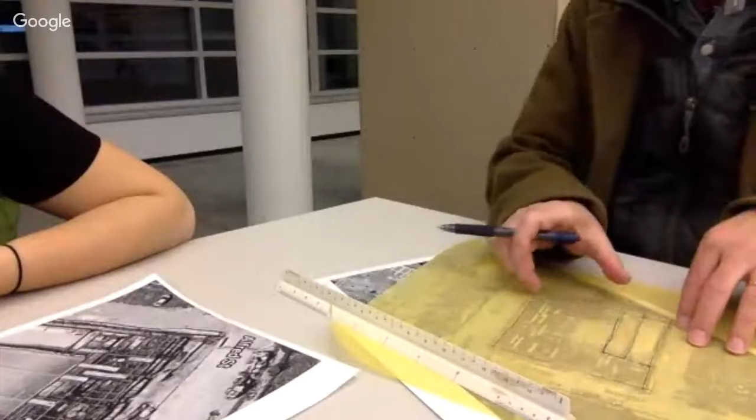This is that speed ramp, and while it's going down from the alley here, we realize that there's only kind of an L shape that remains, right? A thin liner of opportunity, an outer leg of opportunity along John R. And the rocks in a canvas bag conversation that I was having basically says something doesn't seem right. So let me just double check this real quick because this looks big suddenly. But basically it meant that everything that was going to be running along 151 divided by 16.

This one's 1/32nd. Oh, this is 1/32nd. Yeah, this one's the 16, but it wouldn't fit on the page, I get it. So 151 divided by 32. So 1/32. So it doesn't take up that much room, Andrew. That's true. 1/32. So that's not a scale I like. 1/32 of an inch. So 1 divided by 32 times 24 equals 0.75 of an inch, right? So I had it twice as big.

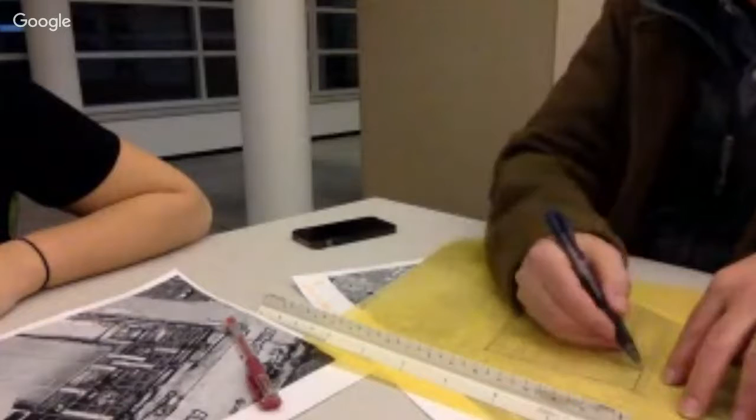So knowing that I've got that footprint remaining, right? I say, okay, I've got a lot of first floor program that I've got to fit. Do you mean like ground floor? Yeah, okay, that's right. That I've got to fit somewhere on the property. And on the first floor, that program says that I've got to have retail along the corner at that northeast corner, probably more along John R. and probably just an acceptable amount along Alfred, right?

But like I was saying about the rocks in the bag, we're also going to have things like trash, right? Loading. We're going to have a stair probably down here. So, right? We're probably going to have a stair over here somewhere. I'll just put it here for now in the corner. And those are fairly remote from one another, and they'll work for an upper floor. And so all of that program starts to play out like this.

So you put like the trash room and the generator, right? Because generators are going to need to breathe. Trash rooms need to have overhead doors that allow the trash to go out to the alley, right? I could probably get the retail in this realm here. I can probably get like a lobby in here that connects somehow, right, to the back of the building off of the street, off of Alfred and back to the back of house. So this leaves this whole area for mail room.

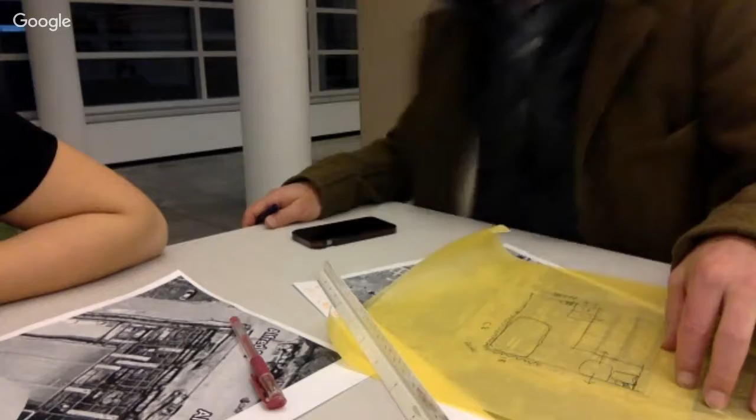And what are the other program elements that we have in that? Keep going up to the typewritten. My typing, that's printing. That's like stuff that I did in InDesign. Go all the way up there. So all of those things on page 2 of the program brief, Andrew and Desmond, right? All of that stuff. So I'm going to walk over here real quick. Yeah, that's where it shows ground floor, percentage.

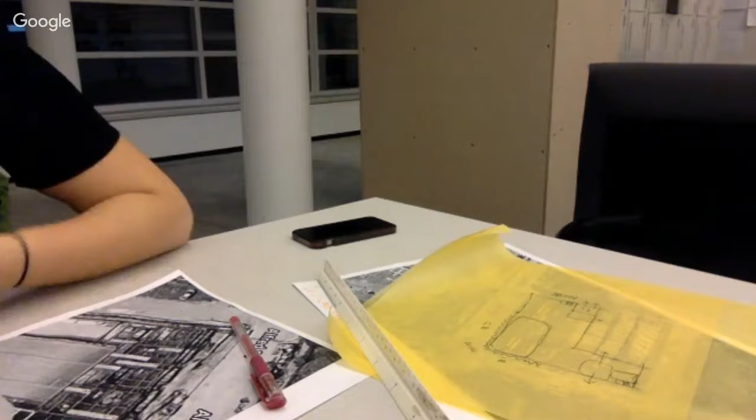3,000 square feet of retail, a lobby that has a mail room, a sitting area, a leasing office, a meter room, building maintenance shop, mechanical room, electrical room, loading, unloading area, transformer that can go on the site, generator room, recycling and trash room, subgrade water cisterns if to be determined, bicycle storage.

So you guys, while I appreciated the innovation, right, of the program spaces that you brought to the table, you have to account for all of those spaces first, right? And you're going to see that the inclusion of all of those spaces, they're going to fill up, right? They're going to fill up all of like leasing office, mail room, right? Their bike storage maybe, or bike storage here. It's going to fill up all of this stuff.

So in the shape of the L that you've got, where you privilege retail to the hard corner and to John R. and Alfred, the fact is some of these don't look good on the street. They're going to have windows in them. You're going to want to have windows on the ground floor as much as possible. So things like bike storage, that could be kind of an interesting program element that lets its face show on the street. But the meter room, the generator room, the trash room, right? All of those things start to maybe line up on the west side of that fat L.

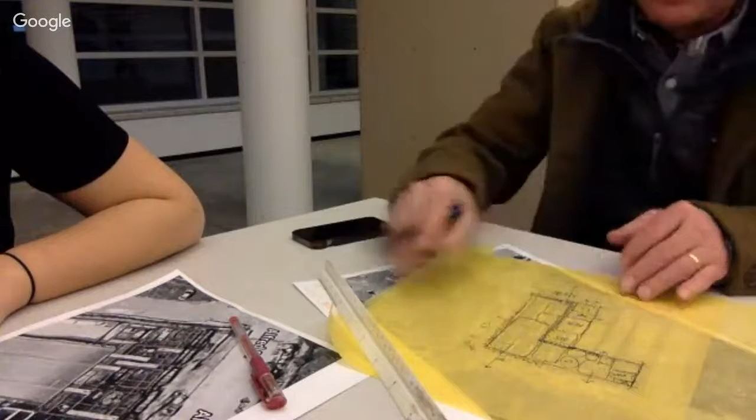So including all of those program elements in the first floor, a first floor that has nothing really to do, you guys, with what's going on upstairs in terms of footprint, is probably going to look something like this. The ramp is here. At some point, you can slip under the ground floor of the ramp, and all of this area here, I could probably draw this better, faster.

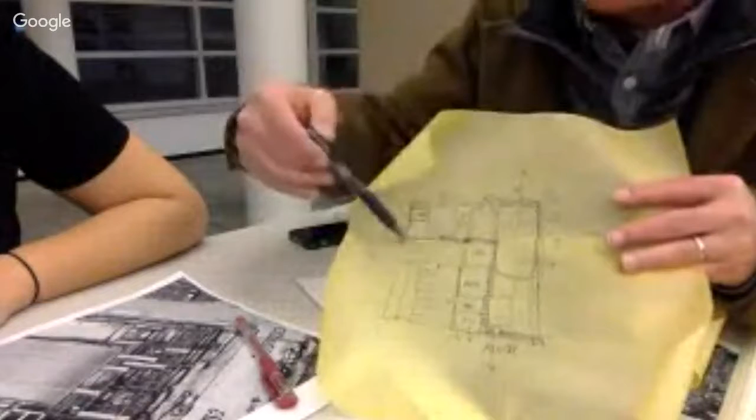All of this area here that I'm sketching on is outdoor space. So I'm going to summarize that. Right? That makes sense. So again, what I'm trying to say is the alley is here, John R is here, and Alfred is here. You come down the speed ramp, and at some point, like when you walk under a stairway, you have a little ability to bring some of that landscape across.

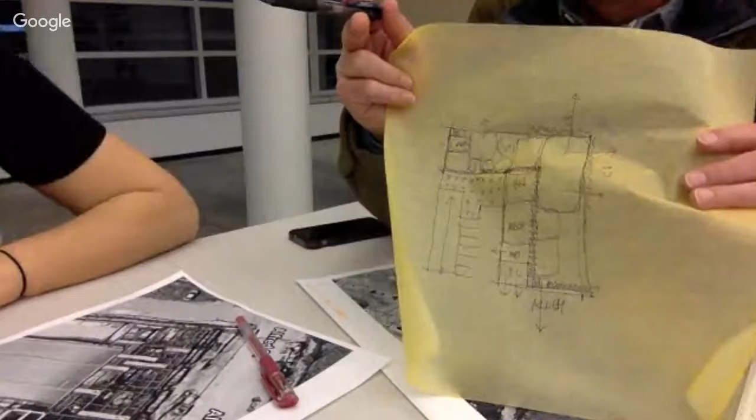But you're going to have basically a buildable footprint that you can mark out that looks like this. That's going to have an area, right? And that area is your ground floor area. And the reason I'm mentioning this is because some of these first floor program spaces are based upon a percentage of the ground floor area. So if you have a 4,000 or an 8,000 square foot ground floor area, and you have to do a meter room that's 2% of the ground floor area, you suddenly know how big that room has to be.

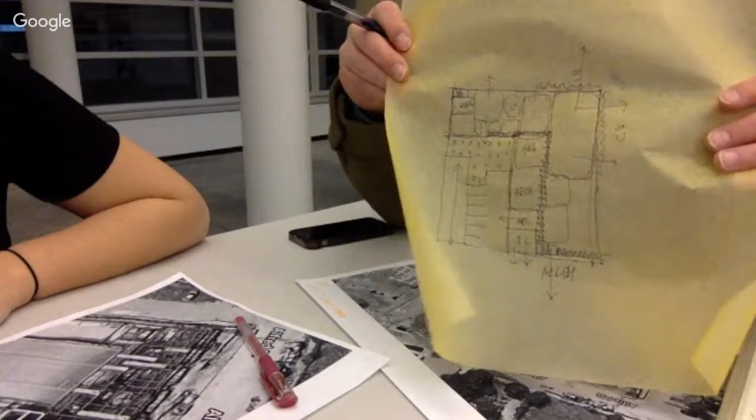And the ziggy-zaggy lines that I'm doing here, that could be a simple service corridor that lets all of those spaces connect to each other and link all of the back of house spaces. So I'm gonna give you this. Now, that's the first thing that I do. The second thing that I do when I lay these out is, and this is exactly what I meant the other day when I said draw by hand.

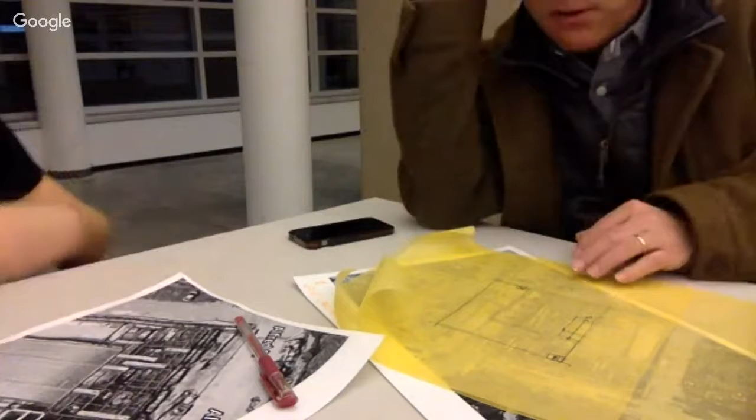I've got the speed ramp coming down. So now I'm at the lower level, right? The speed ramp is probably going to run to here, and it goes up, and like a stairway, it gets cut off. I know that ideally there's going to be a stair in the corner, and maybe a stair down here. Because I've done this class before and I've done this building before, I kind of know that it could work reasonably well when I start dropping parking spaces and drive aisles into that lower level.

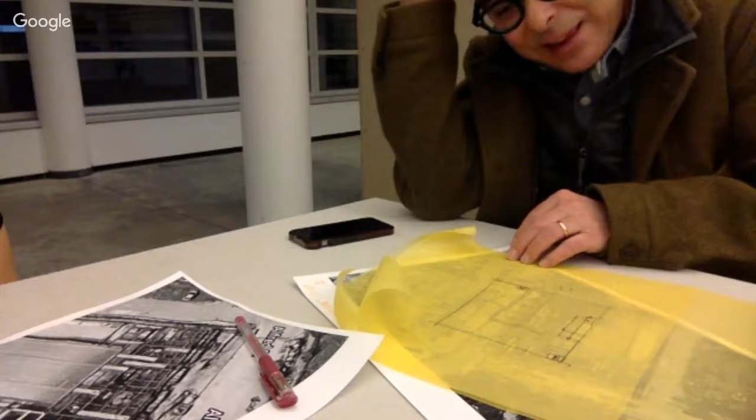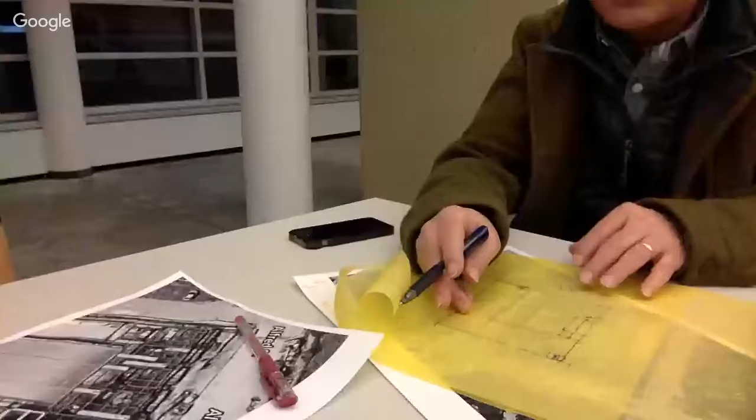Now, I also know that there's going to be elevators and things like that. I don't know where those are going to be. We can finesse that. But one thing a lot of your colleagues have done are what I would call 90-degree parking spaces. You know that you can get about 6 spaces upstairs, right? You might even be able to get 8 spaces upstairs, so 6 here and 2 here. So you may need to provide like 42 or 44 spaces down below.

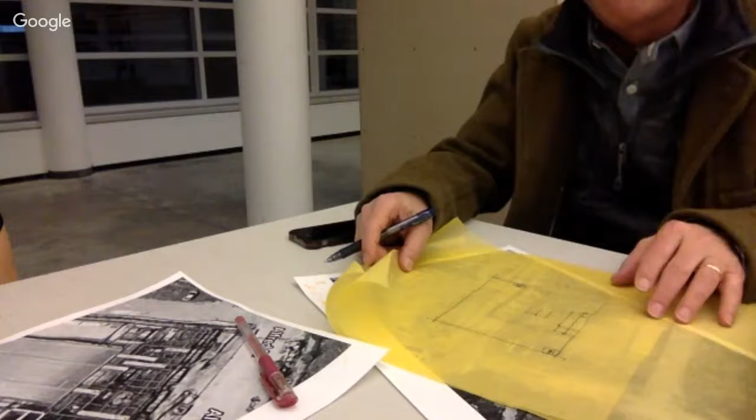One thing everybody's doing right now is 90-degree spaces, but you ought to consider that those spaces require 20-foot aisleways and 20-foot depth. What do you mean by 90 degree? So the spaces I drew here on the site plan are 90 degrees. What kind of car do you drive? Mercedes. So your Mercedes parks like that, and that dimension is 20 and 20. Are you talking about the angled ones they have in shopping centers? I'm talking about regular parking, 20 and 20.

What I am saying for the lower level is like in downtown Birmingham, the parking is at an angle. And when you do angle parking, it takes up less width. So for me to get 3 rows of parking spaces in perpendicular parking, like your Mercedes is parking there, that's 60 feet. But just doing angled parking, I take up less width, so I may be able to get more spaces in a run that looks like that.

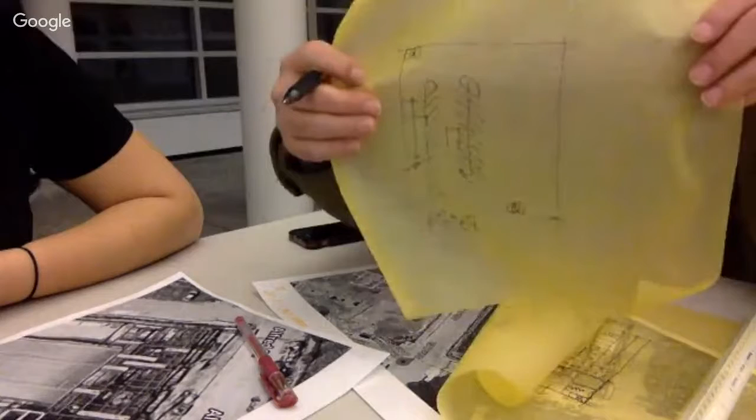Desmond and I spoke after the last class. We mentioned possibly doing 2 floors of underground parking. Is that something that normally wouldn't happen? Or 1.5 floors underground. But this is what I'm saying. This dimension from here to the center line is less than 60 feet. It's like 56 feet. And you may be saying, it's just a couple of feet, but that's a big deal when you're laying out parking in a lower level. So I would try to do that.

And I would look at the lower level as a simple arrangement of maybe one-way traffic that moves through the development, something like that.

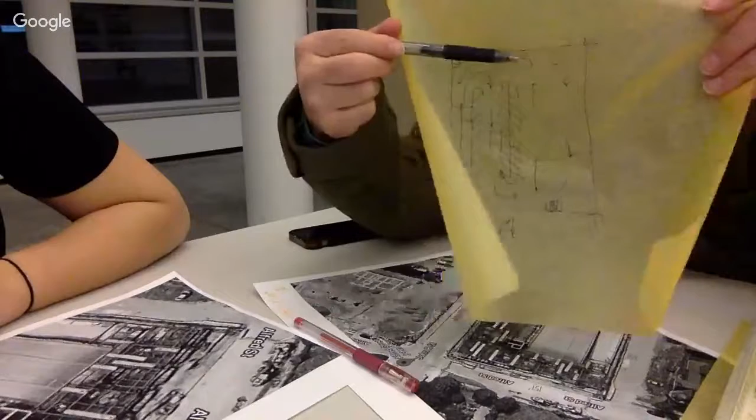So that when you're ready to leave, right? I added that one and I added that one. When you're ready to leave, you go back up. That works. Right? Now, so like another, I'm not saying that this works, but there's a good chance it does. It's my instinct. So that kind of thing.

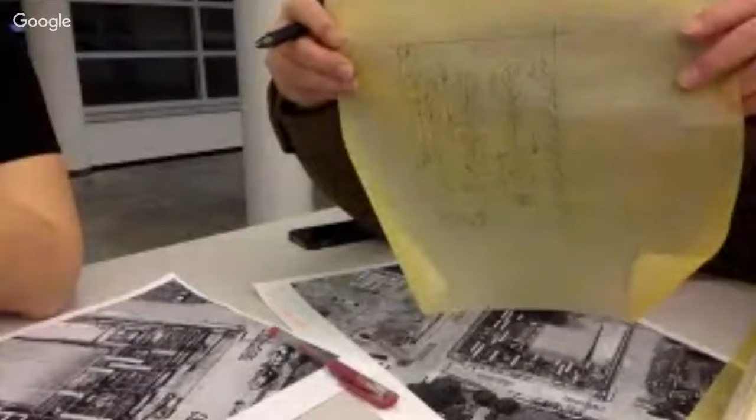What I'm pointing to now is the new parking spaces, right? So this is how I think. When I'm laying these things out, I try to draw to scale, right? I draw in a forgiving medium on a base drawing like the site plan that is to scale, and I just operate on those instincts. And now I've got two plans that are interconnected and work with the parking, right? I don't have everything worked out yet, but I have enough to go on. And you both should flesh that out.

Now what I do is I go to the upstairs. Do you know what the slope is by any chance of that ramp? Is there like a certain? Yes. So that ramp has a profile that starts at grade up at 0, and it drops. So I'm going to draw you the section.

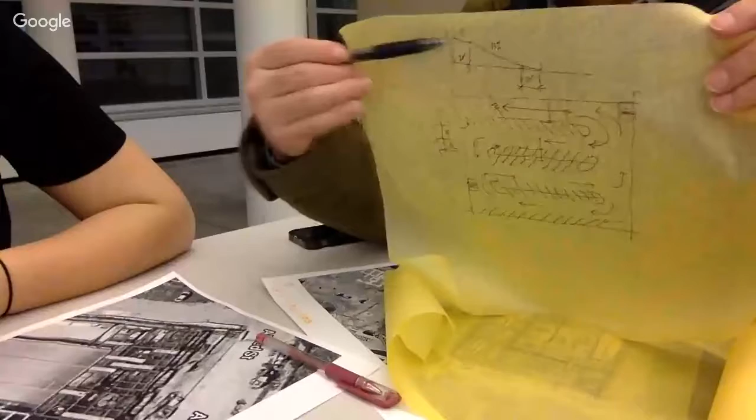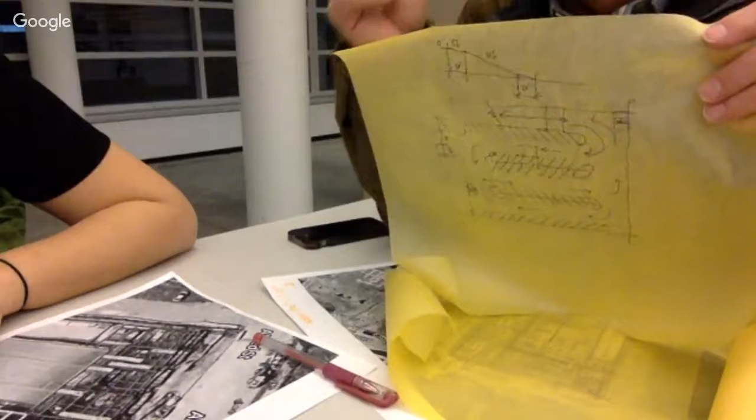So what I've drawn is a section up at the top. At the alley, which is right here, you're at 0. You have a 20-foot, that's a dimension right there. You have a 20-foot paved sloping drive that's at 5%. Okay. That's a transition strip. And you have the same transition strip down at the bottom. And then in the middle, for the length that you need, you can go as much as 13%. Makes sense. Okay. You follow that, right?

Okay, now upstairs, you can go about these things a couple of different ways. Start with the footprint of the site. I'm always trying to contextualize the object into its context. I know right now that we can probably get about 12 units, maybe 13 units per floor. I know that there's going to be a stairway in the corner and there's going to be a stairway at the bottom. I know that because that was an assumption for the lower level and for the ground floor level.

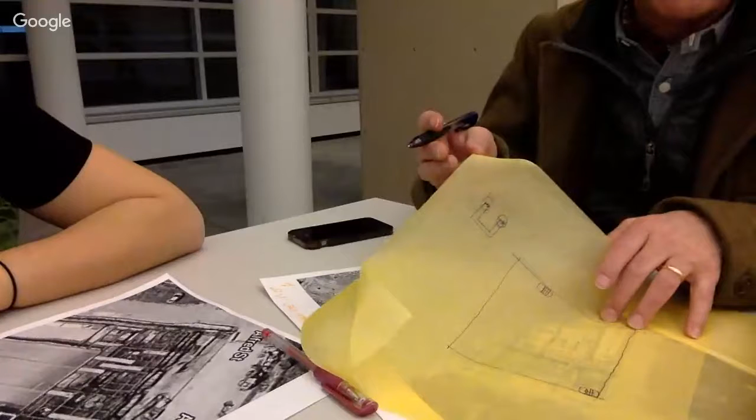You see that? You have to have a stair there at the end and a stair there at the end. So what I would try to do, given where you are in the class and given the nature of this beast, I would start with a simple L, right? And say, okay, if I do that, I know that the corridor is going to be sort of more or less down the middle, but it doesn't have to be. And it's going to look like that.

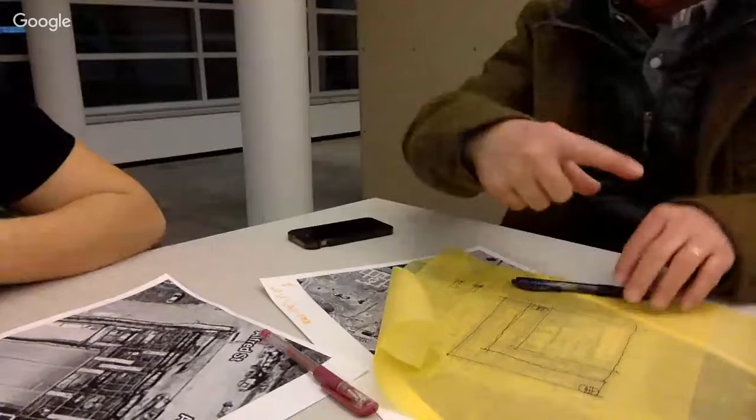I know that the corridor is going to be about 5 feet, maybe 4 feet, right? So right now I've got 2 nesting L's, right? With the corridor as the common thing linking them, looking like this. Capiche? Got that.

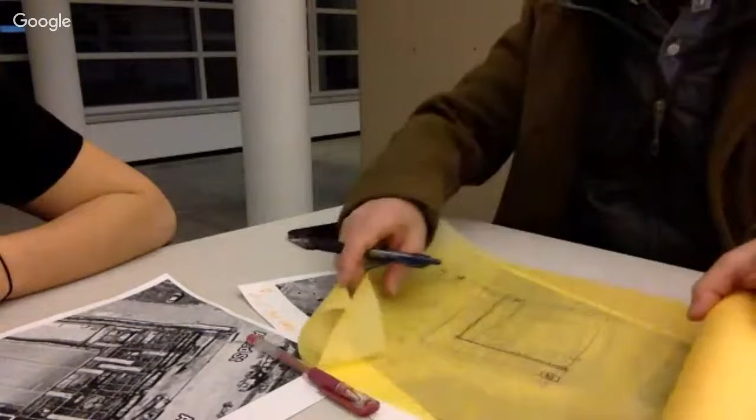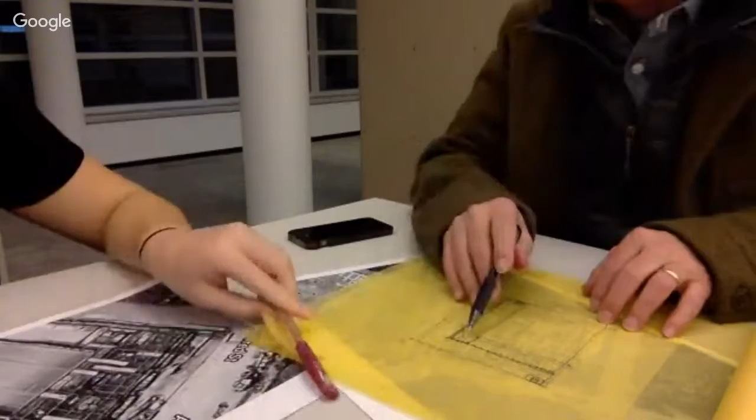And I know when I do an L or a U, I've got a moment where at the sort of armpit or the hinge of that L, where they articulate, where I've got the X now, I can't put any residential content there. Why do I say that so clearly? Because I can't really put sleeping rooms and living rooms there because there's no wall, right, that would have glass.

So that hinge, that armpit is really good for things like laundry rooms, bike storage or personal storage or telephone electric rooms, right? Shafts that might be coming through the building. So the dead zone, if you will, that armpit is actually your friend. So use that to the extent that you can.

So that means I've got a bar that runs here facing south. I've got a bar here that faces west. I've got a bar of residential that faces north and east. I've got an opportunity for this unit here to have light coming in at the south and the west. Likewise here, likewise here. So those are really good 2-bedroom units.

So now I'm going to want like a red magic marker or that orange Sharpie. Do you have a red Sharpie in there, Desmond? Got red pen. Oh, I do. Yeah, of course you do.

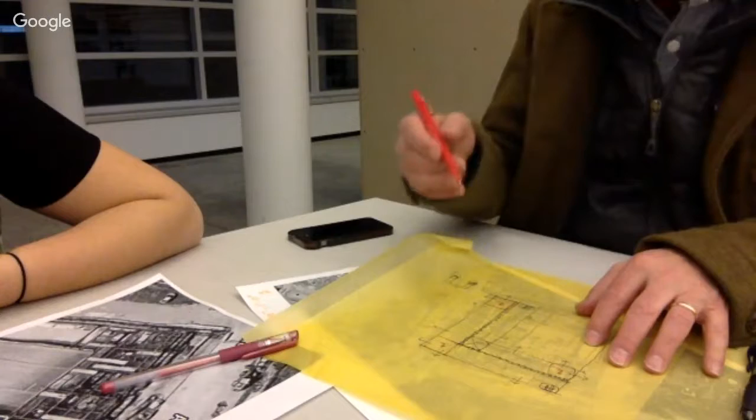So like these, you guys are really good for 2s. How many do we need in the building? 7. 7? 3 floors, 4 floors. So, yeah, you probably only need 2 per floor, right? So suddenly now I've provided instinct, right, on where those should go, Andrew, right?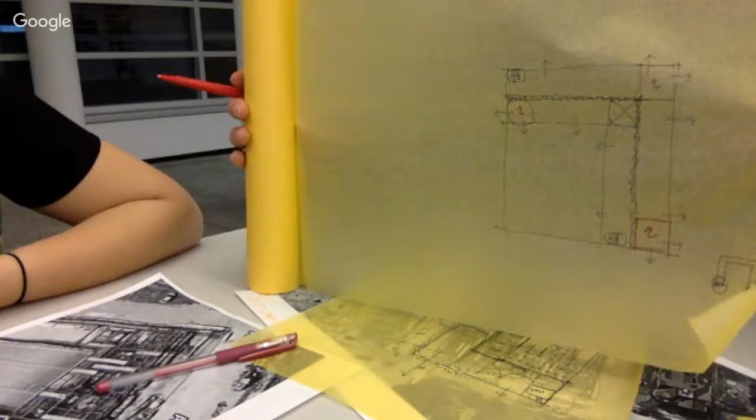Makes sense. Right? Because those are the units that, because you have 2 faces or 2 facades that face different sunlight conditions, you can charge more for those, right? They're corner units. So those are the ones that you generally want to be the bigger units, right? And you charge more for them anyways, right?

So if you do 4 floors of residential and you have how many 2-bedroom units as a requirement? 7. 7. So really you only need 2 per floor, right? 2, 4, 6, and maybe one on the top floor. Penthouse. Yeah. So you can skin that cat any way you want, but you've got sort of 3 options already. You only need to pick 2. You see what I've done? That makes sense. Okay.

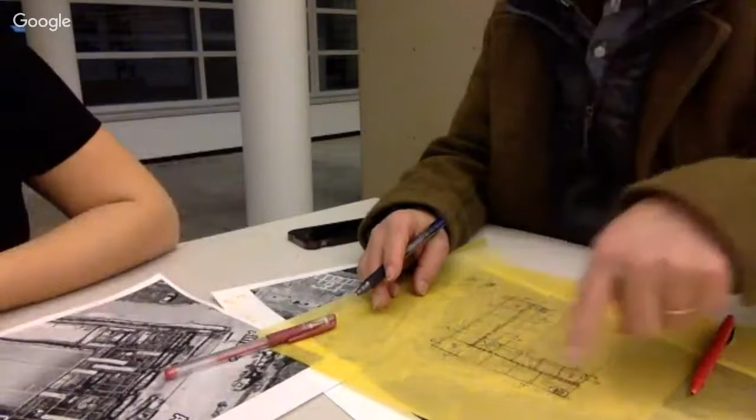So now I know I've got some square footage now to divide up into units. So now I think I can get 1, 2, 3, 4, 5, 6, 7, 8, 9, 10, 11, 12, 13, 14, 15, 16. So I think I've probably cut this cake into too many pieces. These are probably farther apart than I've shown. You see that? But that's okay, because those are just conceptual

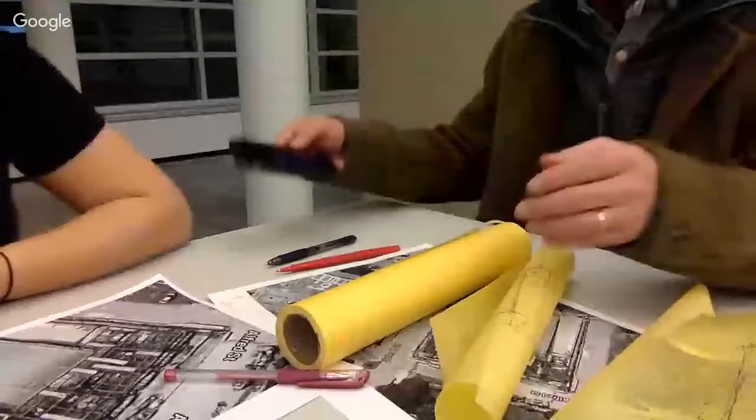demising unit walls. Because I know I'm going to have 4 floors, right, of residential. So 4 floors, 50 divided by 4 is 12.5 per floor. So if I hit 12 per floor, right, so I start over. So maybe stairway.

Maybe the 2-bedroom unit is here. Corridor runs down the middle. We know we have an armpit space here, but maybe this is exercise or laundry. Do we need the exercise on every floor? No. So 1. And you don't need laundry on every floor.

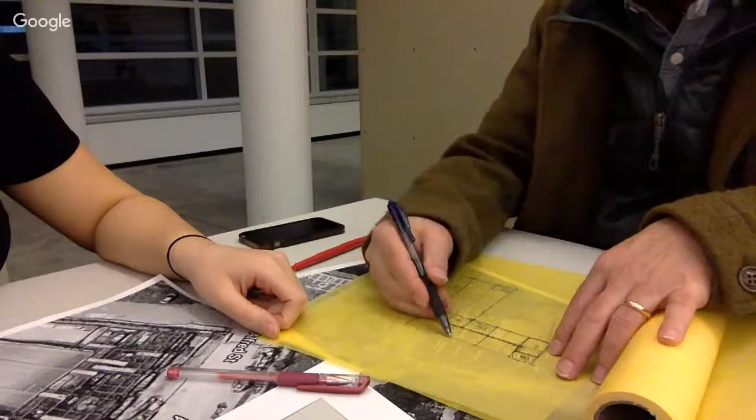Would you recommend putting the laundry and the exercise room all in one floor, or kind of scatter them throughout different floors? I would scatter them. Every other. Knowing now how this is going to shake out. 1, 2, 3, 4, 5, 6. And maybe in the same spot, just so they could relate to it and they know. Yes. Yes, I would do that. I would stack them. Okay. Is that what you meant?

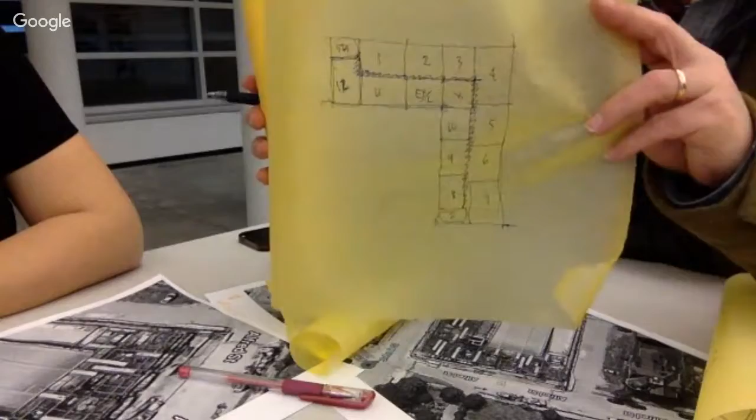Correct. Yes. So 1, 2, 3, 4, 5, 6, 7, 8, 9, 10, 11, 12. Makes sense? Okay. So now I'm sort of saying, okay, I've got an interesting sort of approach here. And the lengths of those spaces, those can all be finessed by you. But now on the second floor, right?

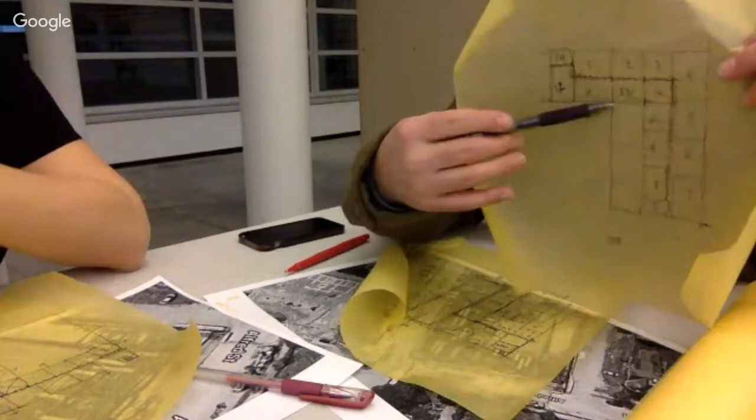Right? I've got some program from the first floor right here. This is the roof of that back of house stuff on the first floor. Okay, so we have an outdoor space or something. Is that what you're getting at, or?

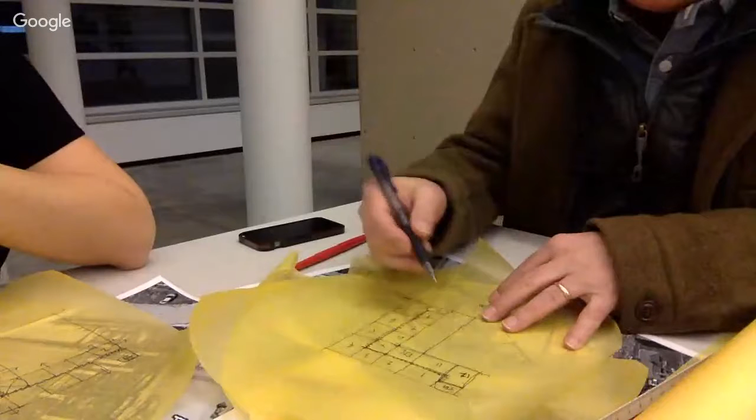Yeah. So the second floor units can be... Terrace? Yeah, so like unit 8, 9, and 10, you see that? Can have terraces, right? I've always said that if I lived in one of these, take the second floor. The penthouse, not so much. You know, I'm not Kanye, right?

That doesn't interest me. What interests me in these buildings is the idea that I can like walk right in, take the stairway up to get to my unit, and similarly, like reverse that process to get out. I can be in and out of the building very quickly, and get my exercise at the same time.

So even if I lived like at the Townsend Hotel, I would live on the second floor, and I'm not alone. Because when I was at Victor's office, we laid out Mr. Gore's suite in the Townsend Hotel, and he wanted the second floor for the same reason. I thought, how interesting. So that's an idea, right?

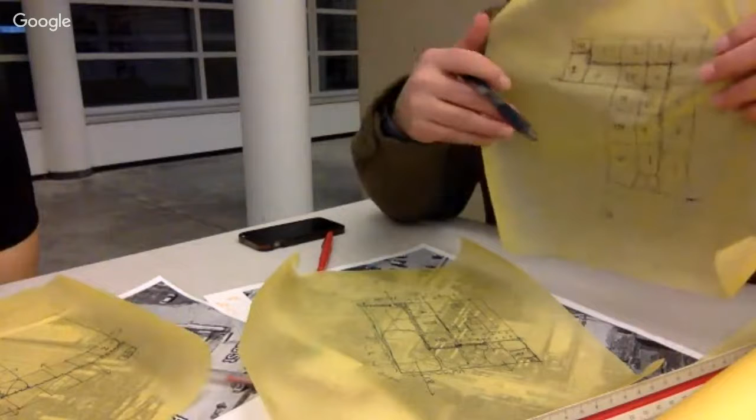Like finding a way to make lemonade out of those lemons, using the roof of that first floor stuff, right, as an opportunity for some of those units, right? So even though they don't necessarily have the great view, they could, right?

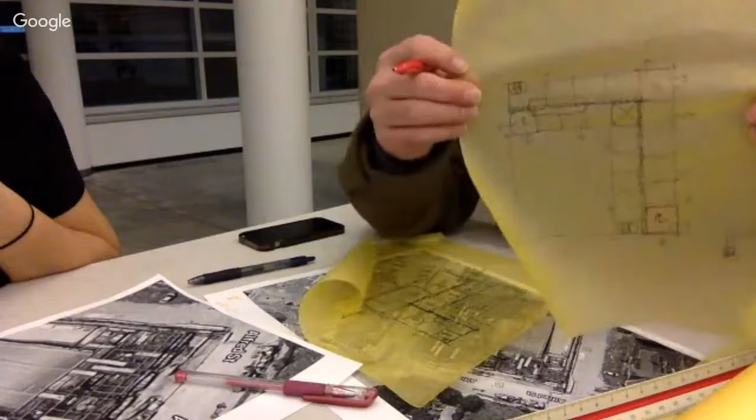Now, we still haven't figured out where the elevators go. But in my mind, the elevators can go sort of anywhere in this area here, in the red circle. So they can't go like against... Yeah, the lobby. Well, because the lobby is down there, right?

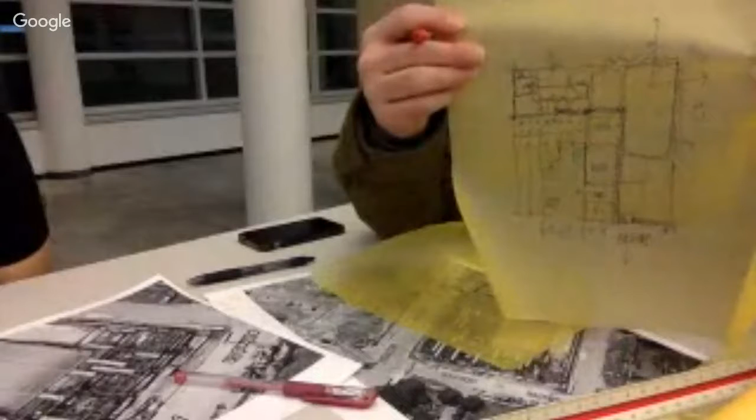So let me overlay that. The lobby is here. So this is that same circle, right? Brought down to the first floor. So now I just got to go, okay, how does it work down below? And this is where it gets painful, right? So I'm going to trace that same circle down below. So it's not working, right?

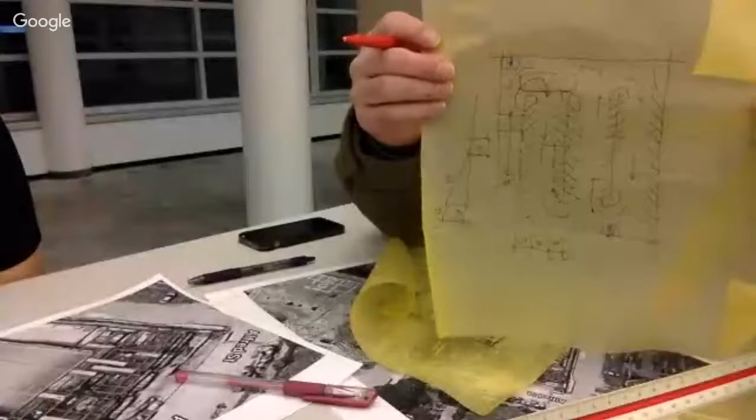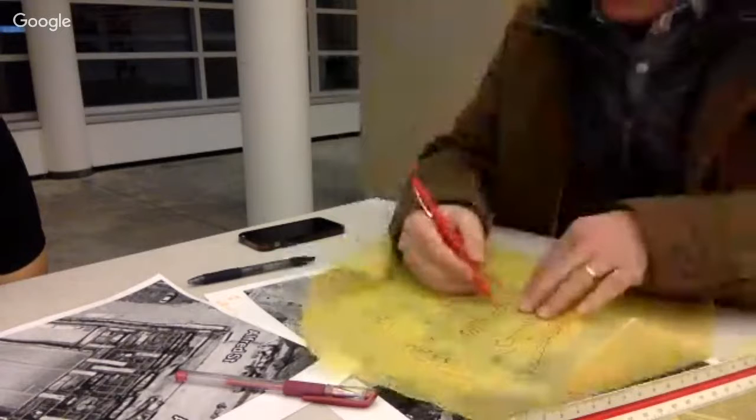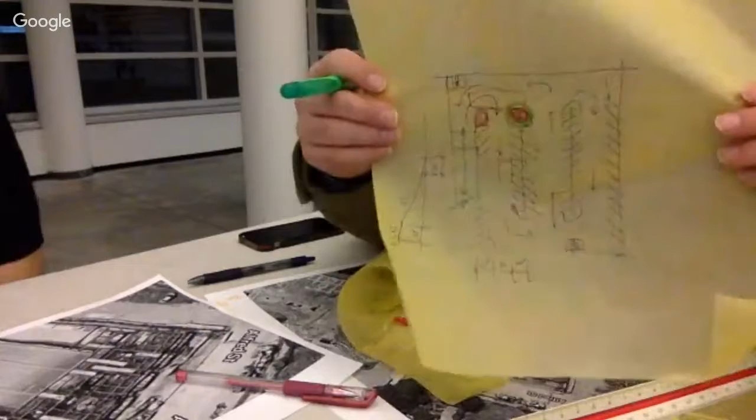Where should it go? It should probably go south about 15 feet. It should probably go somewhere here and somewhere here. And right now, I'm going to take your green marker. Is that really green? I've got a green pen. And I'm gonna wager it's that one. Because I know that one will work upstairs.

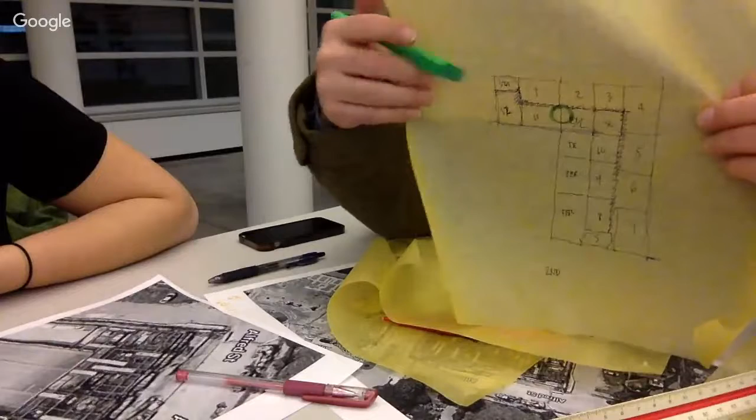Because I've got a lot of units. So the elevator works okay upstairs if it goes there. This is why I wasn't so worried about how many units and how big they were at this moment, right? Because I knew I had this detail to solve. But that could work, right? Can it work downstairs on ground level 1?

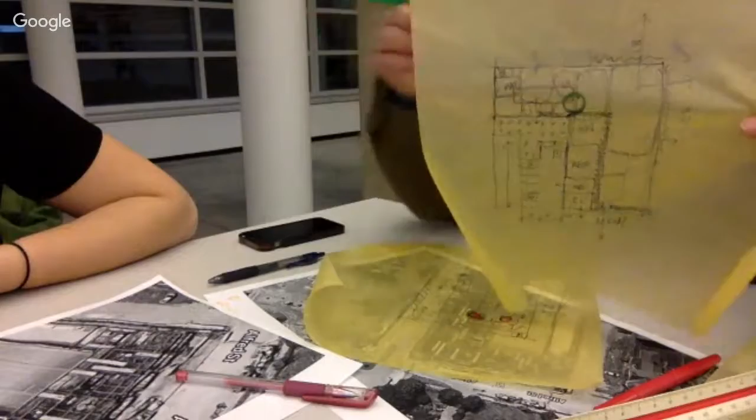All day long, right? Excuse me. And that's how you do it. It's really that simple, right? You used the site plan information and got your directive from the language in that site plan, and you included the parking floor in your early conceptual thinking.

You still have a lot to do. Finding a way to get all of that content into that first floor plan, but I think it's workable. And by the way, if I could have like the orange marker, will that show up? I think that'll show up. It's kind of phosphorusy. But that ground floor plan, you guys, does not have to be pure, right?

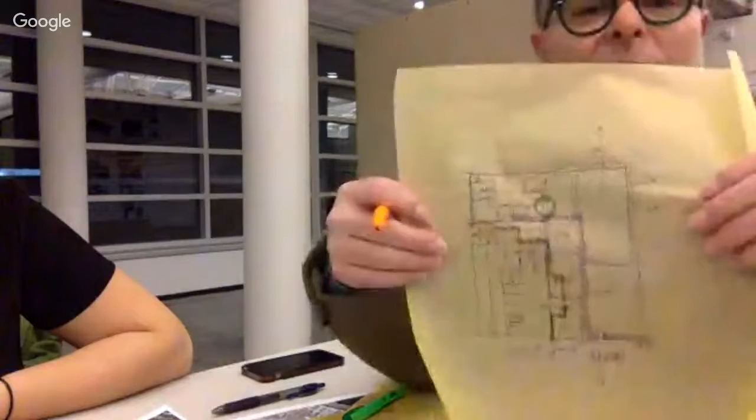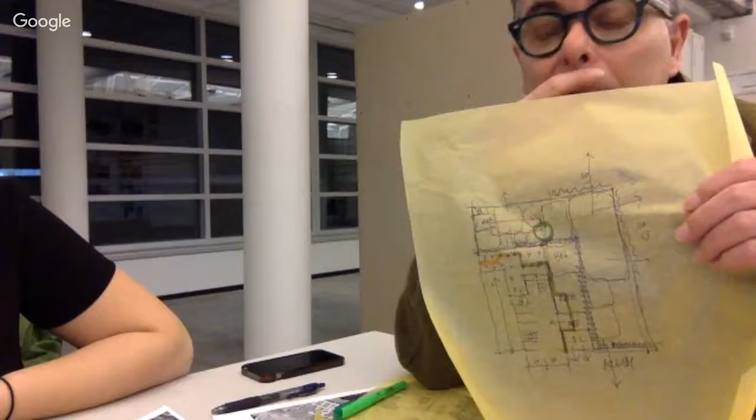That ground floor plan can do that. You see the orange line that I drew? Oh, I see. Okay. I'm exaggerating it, but basically it can zig and zag to meet the ground floor program space requirements, right? Because it's just back of house stuff. And most of the roof of it will be decked. It'll have terraces over it. And whatever's left over, that's the outdoor space. I see.

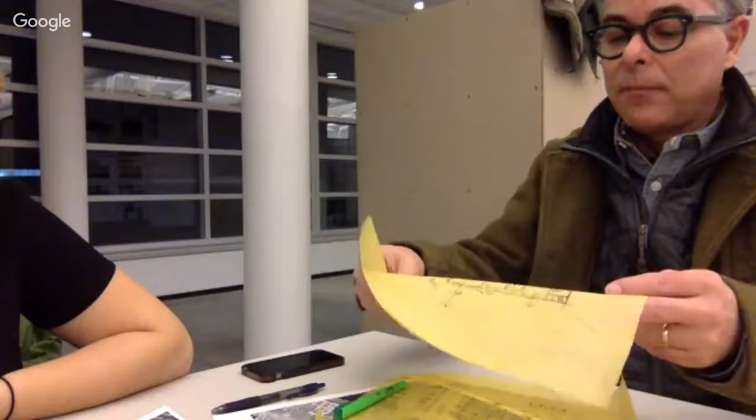Now, the only other detail is that when you decide where the elevator is going to go on that lower level, we know the elevator is going to have to open to the corridor.

So I know that this is the diagram for the elevator upstairs, right? That's the elevator, that's the corridor. And it has to do it that way downstairs too. But it can open in the opposite direction down below. Oh, I see. Okay. So that may be how this works better for you downstairs, where you've got parking spaces and the like.

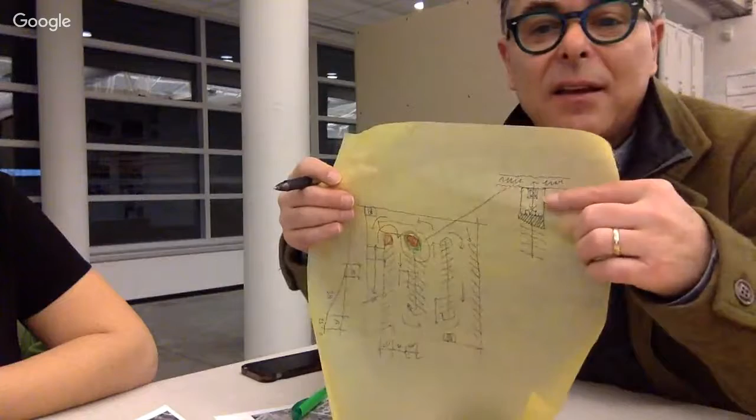So what I would encourage is like a lobby like that around the elevator. So all of this is pointing to that. Oh, I see. Okay. Right?

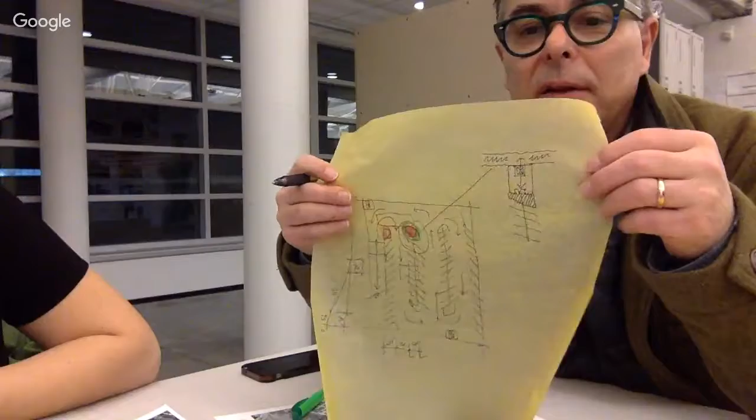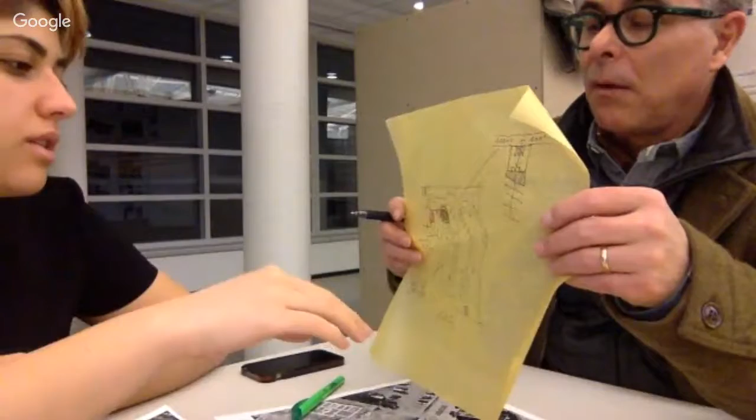That makes sense. So the elevator opens up into the corridor upstairs and into the first floor, but downstairs in the basement, you want to take advantage. What it means is there's some parking spaces that you're going to lose, right? But you take advantage of that because you want to maintain that drive aisle. Definitely. So that's why we do that. So if we wanted space under that for parking, how do we incorporate the driving?

Where is space for parking, like if we don't have enough parking spaces? You will. Oh, okay. I'm confident that you will. Did you look at the plans from last semester? Which ones? I gave you guys in the Google Drive projects the two top projects from last semester. Oh, I saw those. Yeah. You need to look at those projects. These ones. You need to look at their plans. Okay.

And remember, don't be such an Eeyore here, right? We have 6 or 8 possible spaces, right? So you only need to get 42 or 44 downstairs, right? So no woe is me. I'm not. We can do this, right? Mm-hmm. Okay. This stuff is hard.

I'm trying to make it look simple, to give you some encouragement, and, you know, if you can see it, you can be it kind of thing. I'm trying to get you guys to think 3-dimensionally, but I'm also trying to get you guys to think in terms of priorities, right? So lay out the ground floor first with some instincts like the ones I gave you.

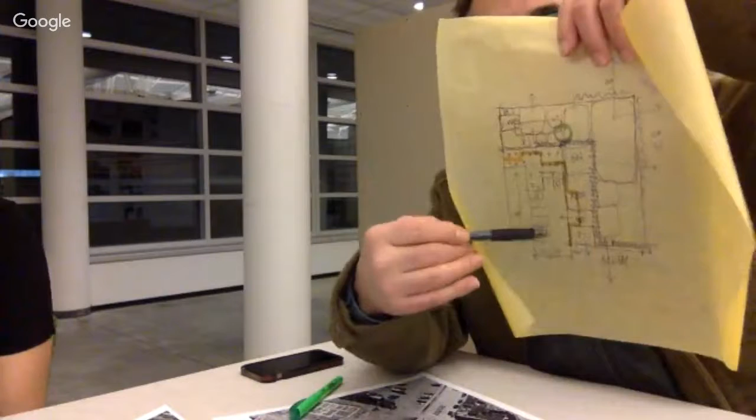And we also know that some of the back of house stuff is going to sag toward the alley to gain access to the services that the alley provides that building. But remember this drive aisle here. I can service the building with this little cutout just because this drive aisle is here. I can still slip a truck in here, like a Snapple truck, and make a delivery and then be out of there before the dude that needs to leave right away is gone. Because the cars that park here during the day might be the people that are working.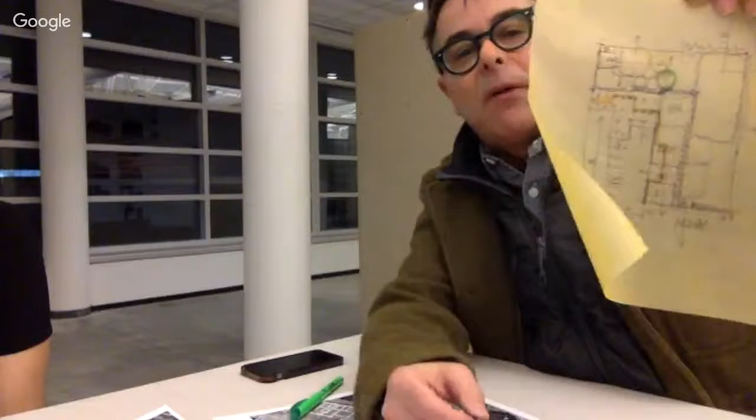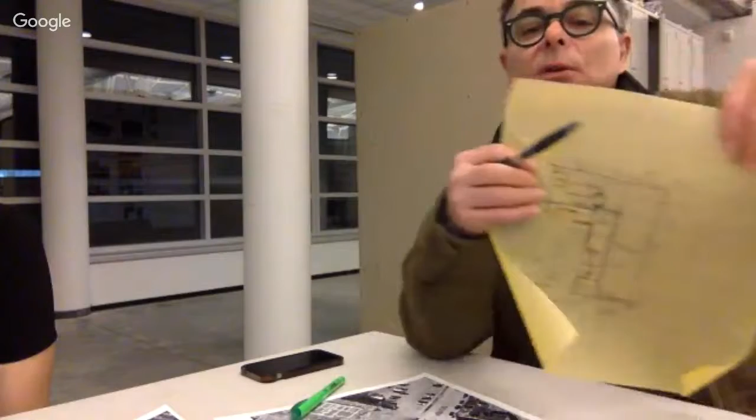Hey, Rasha. They're probably working, you know, they're parking there. Okay. And then as far as I guess they can go. Yeah, you just figure out where those are going to be, right? So that's another thing. The handicap spaces generally fill up the slowest in most developments. So maybe it's these 2 spaces here, right? So they'll never get used. Now, in this kind of program, they would get used more quickly because all of us are handicapped at my age, right? But that's how you approach it. I see. Okay.

Now, this is only part of what you all have to have for your reviews next week. But I think if you work now to lay these things out this quickly, you'll be able to make it. And north is up. Second through 4th floor. Now, we haven't talked about the 5th floor yet. But the 5th floor may not have as many units on it.

Because if we have 3 floors of 12, that's 36. Yeah, it'll probably have as many units. But if you got 13 units per floor, that's 13 times 3, 39. Thank you. So we only need 11 on the topmost floor, 11 units. So assuming 13 units per floor, we still have the stairways coming up. We still have the elevator coming up, right? We still have a lot of units.

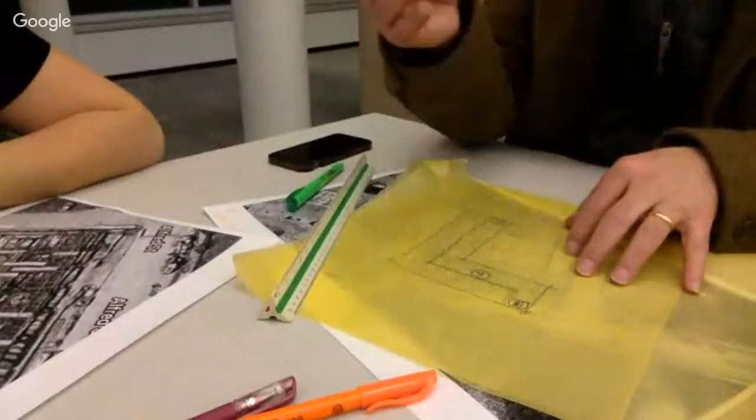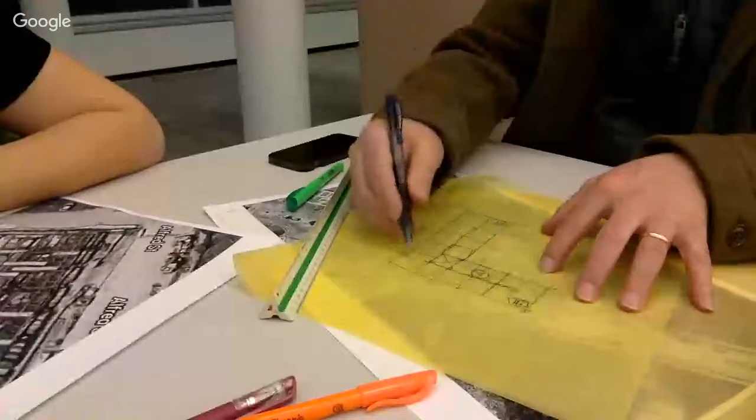This is the shape of that building floor, right? So if I'm gonna drop 2 units and only provide 11, then the built-out architecture on the roof is narrower or shallower, right? So I may say, right here, I'm gonna stop the units. I'm gonna do whatever I'm doing downstairs. Here's the armpit, right? Unit there, maybe that's a different, like a laundry room there. And all of this equals 11 units. Well, you got the point, right? So that would be 11 units.

So then this area here is an outdoor amenity space, right? Do you follow? Which could have a summer kitchen in it, right? And it could be linked, because it's linked to the elevator, right? It could be linked to the stair. So here's the summer kitchen. And then suddenly this can be all wood deck.

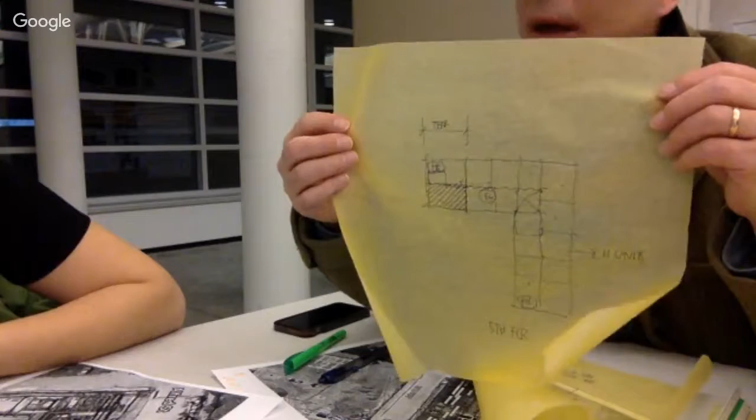Capiche? That definitely helps. Is this starting to come together in your heads? Yeah. Okay. Okay, these are yours. Thank you. Photograph. I can stand. That's how I do these.

Literally, I work on them this quickly because there's so many other important, I don't know if these are any good. There's so many other important things. I think on this site, I'll just tell you, so these are all yours. I'll just tell you that I think the U-shaped plan is problematic if the U's legs touch the alley. Just in terms of stairways, right?

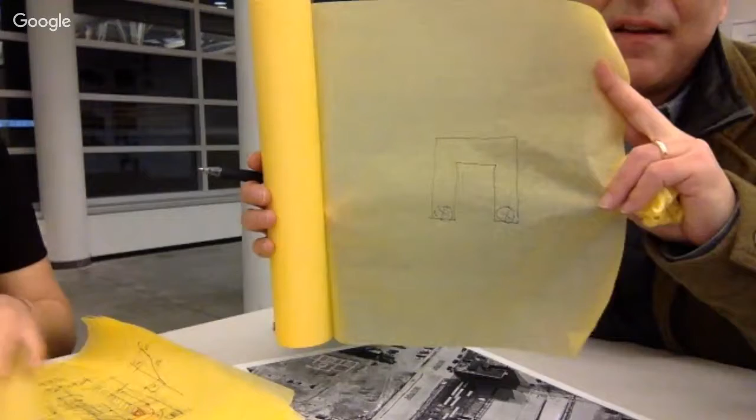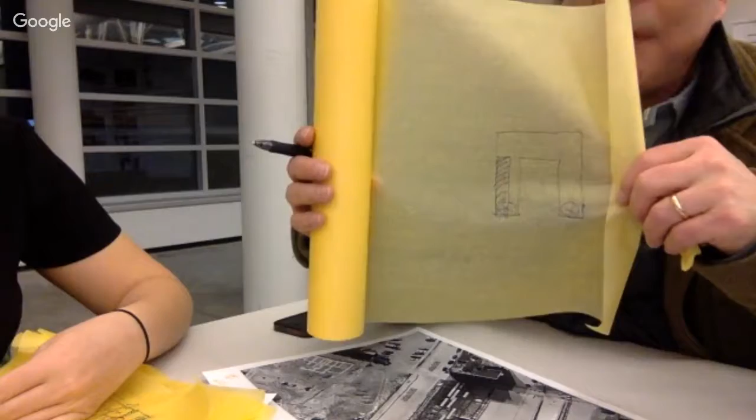Because if I had a U, I'm going to have a stairway down here and a stairway down here. Right? Right? Definitely. And I mean, you can go this way, but I also know that the speed ramp is going to have to sit in there somewhere. So suddenly the stairway's location becomes problematic for the speed ramp. Maybe it can work, but maybe the option is that the C or U is like that.

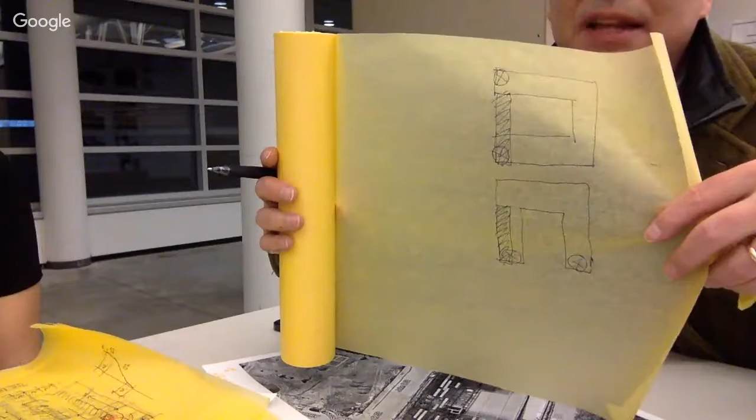But I'm still stymied, right? Because I've got to have my speed ramp coming in here. Right? Do you see why I'm kind of dismissing that U / C shape? Because the final analysis for both of them is bigger, right? So I know that that's going to be a harder problem. So I kind of just run away from that and go with the idea that the L allows for

all that residential program and residential content to fit within it, yield about 12 floors and all of that other stuff that needs to go on each floor. And it's a smaller footprint, so it's more efficient. It creates less interferences, vertical interferences.

Hmm. My wife is wanting to take me out to dinner. Does that make sense? Definitely helps. Thank you so much. Well, no worries. I'm happy to do it. And I got to meet Desmond today for the very first time. Oh yeah, in person. All right.